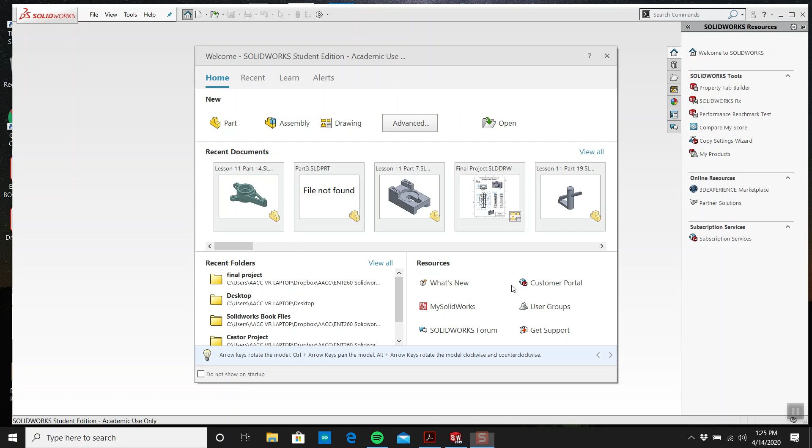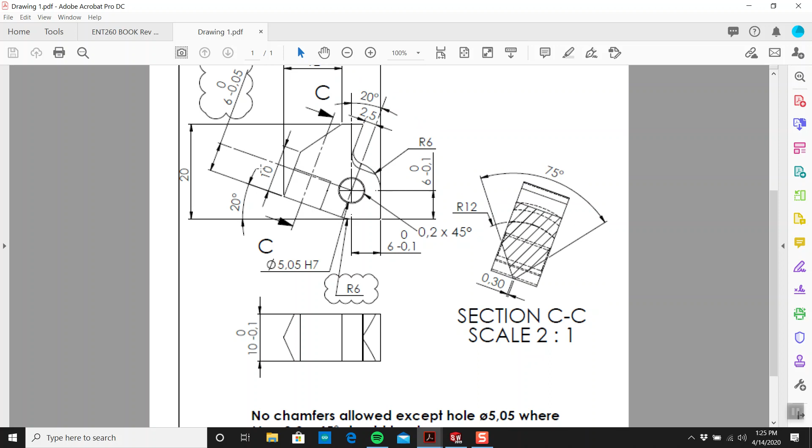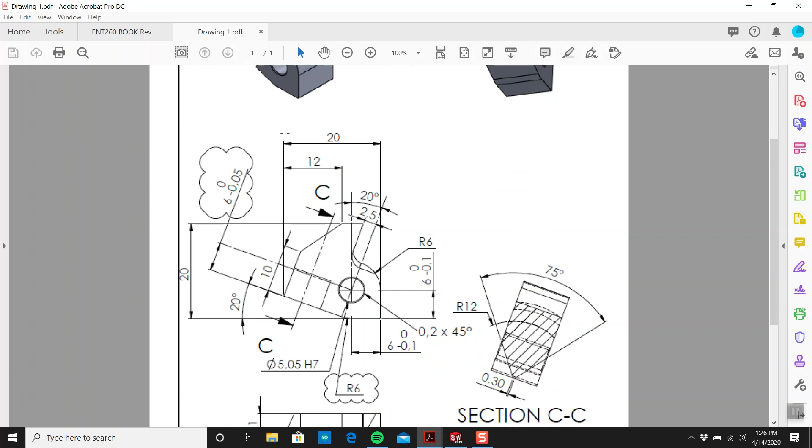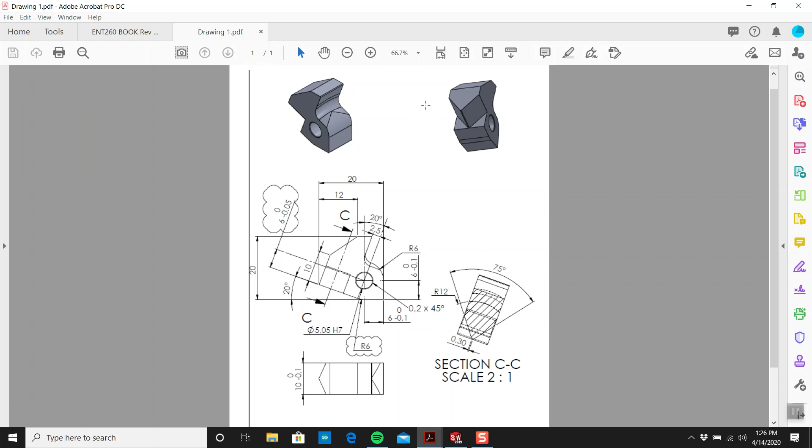Anyway, we'll get back to this later. Hold on, close current tab. Here we go, back to a nice easy part.

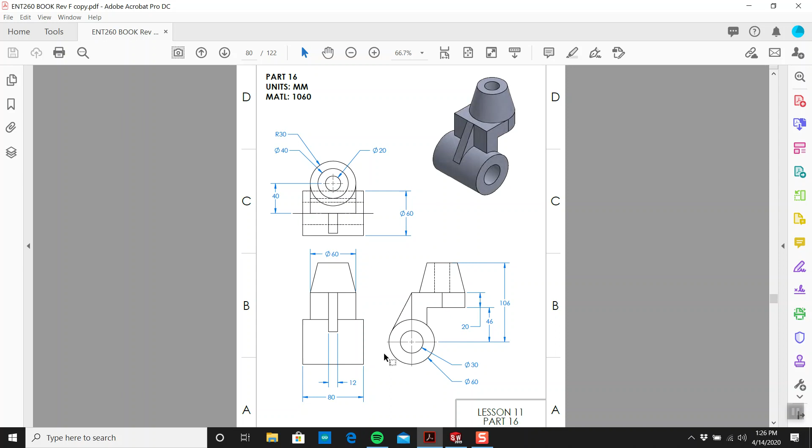So, first thing we'll do is draw this. I think we want to draw this side profile here and do a lot of shared sketches. That's what I'm thinking. This is going to be our origin right here. So let me get my paper out.

Do you know what I should do? I should bump up the financial reward and add that last part. But that is a beast. Anyone else that has parts like that, definitely send them on to me. If I have any naughty bold students in the next few semesters, that's going to be their extra homework.

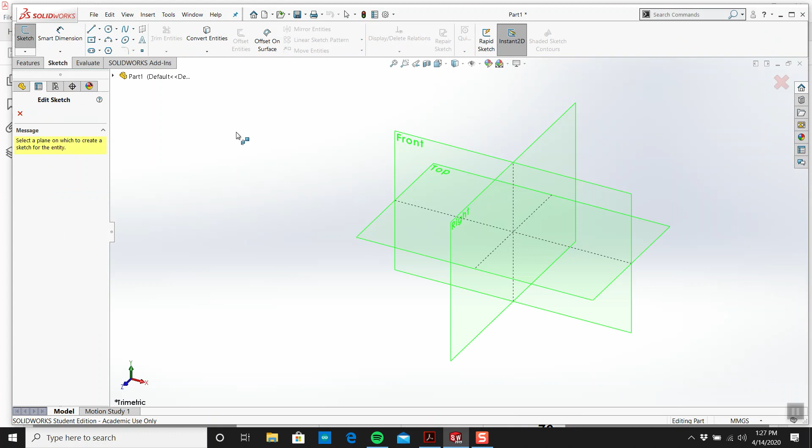So anyway, we have a diameter 60, a diameter 30. I can remember these, right? So let's go and get a new part. We'll change the units again. And we have two circles there, 60 and 30.

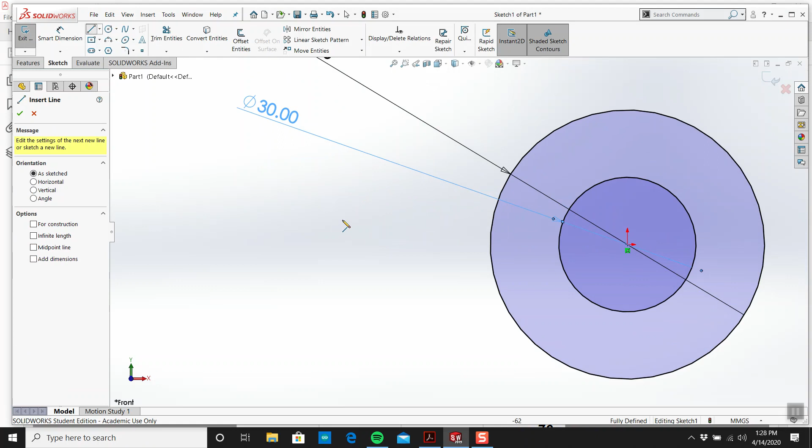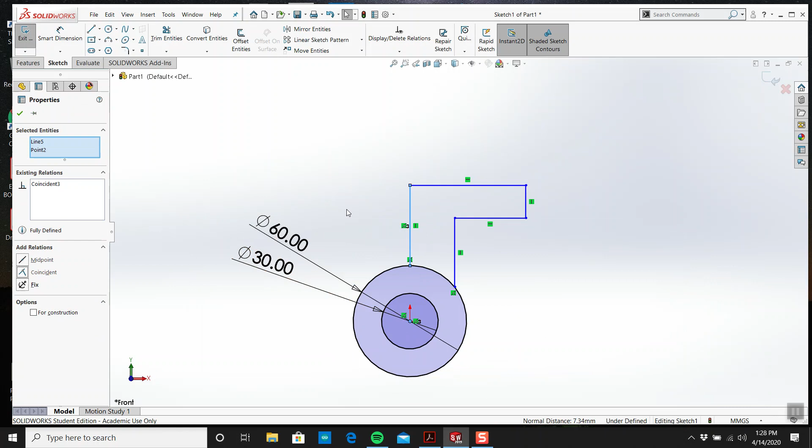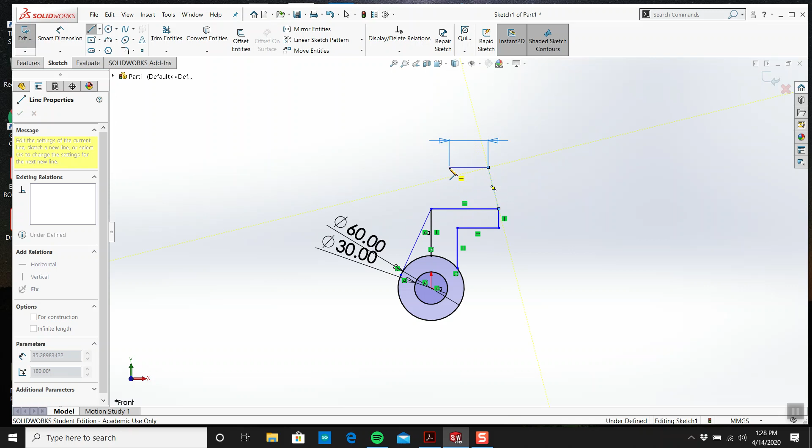Now we come up here and we have like an L shape. So if I come up here like this, maybe something like that. Does that go all the way down? It does. This and this are coincident, and then this is a tangent line from there. Now I'm going to make these two tangent. And what else? We have that. And then there looks to be some sort of something like that.

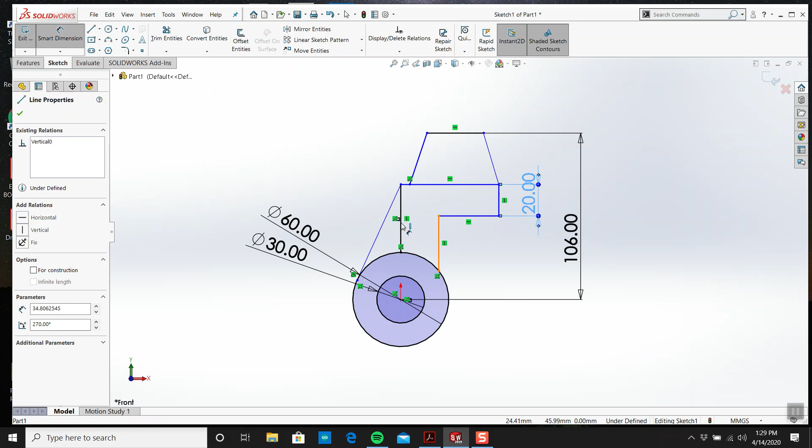Now what are these dimensions here? 20, 46, 106. Let's do the 106. Where's that going from? From here to here, 106. This is 20 - now this is missing from the drawing, so bad form on me. That's 20 there as well. And what did we say? 46.

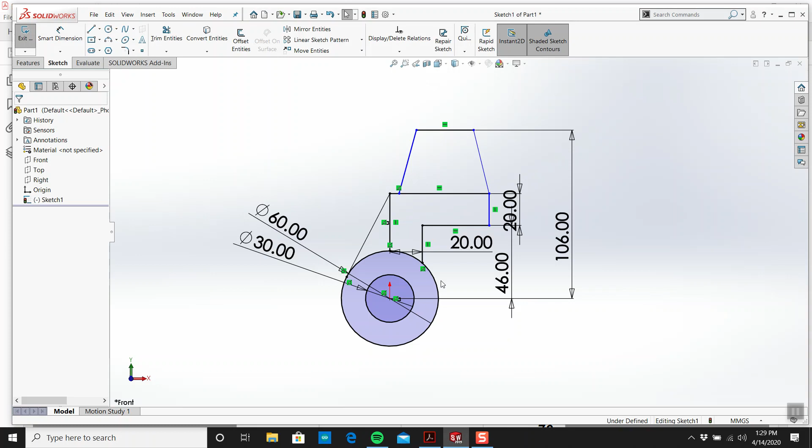Alright, and then we have the 60. What is the depth? 40 - 40 will bring that to the center of that. Oh geez, what does that make me think? If I get a center line from there, can I make this vertical? I'm going to make that 40. So from here to here is 40, and that brings that out. That's okay.

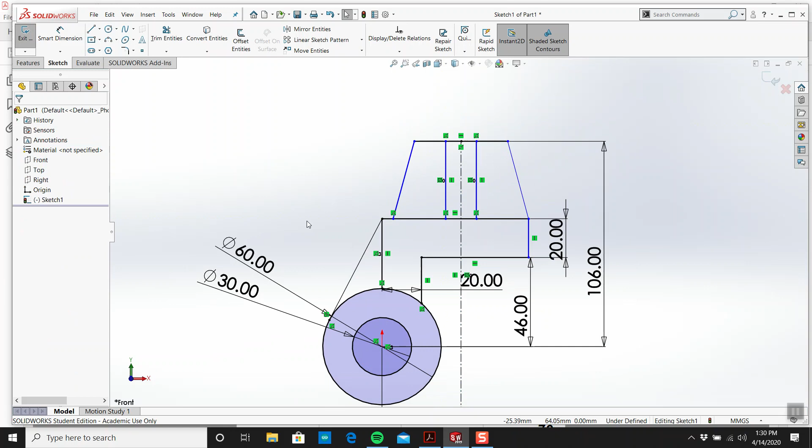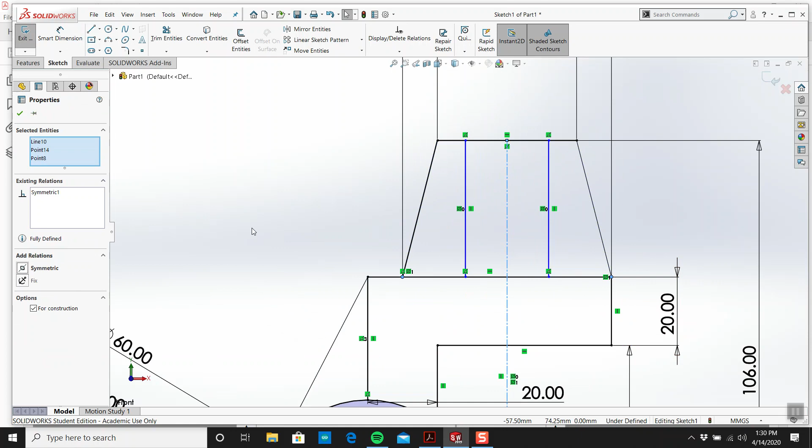And we have a line that goes from there to there, and from there to there, and this is symmetrical. Now the top of this is 40 and the bottom of that is 60. Is that right? So from here to here is 40, and from here to here is 60. Now this point and this line are going to be symmetrical, and that pulls that in, and that's all black, fully defined. And then this is diameter 20. Okay, that's my sketch.

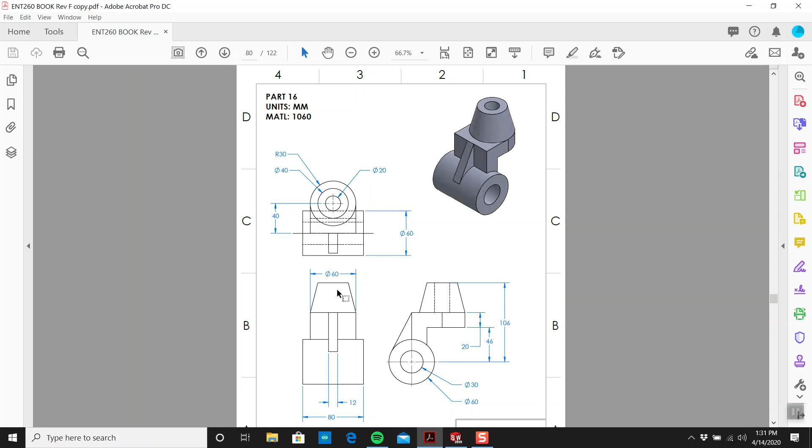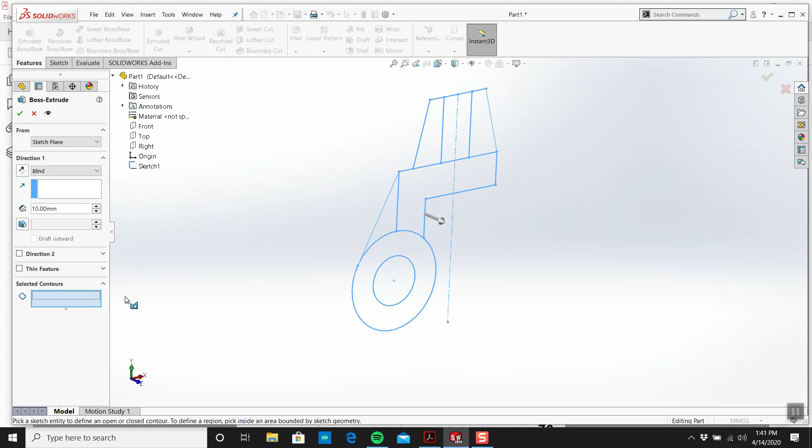So I'm going to exit out of this, and do an extrusion, mid-plane extrusion of 80. Just bear with me one second. Right, sorry about that. Where are we? We got this here. So I need to extrude this 80, don't I? Mid-plane, I'm going to make this 80, and go OK.

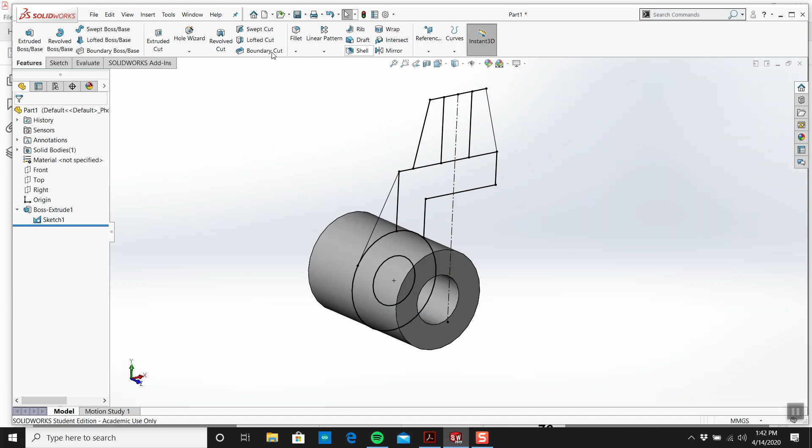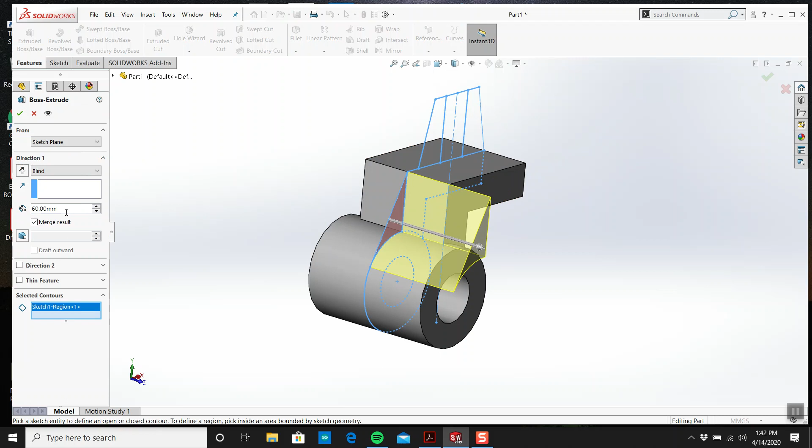And what's the next one? This L shape, and that comes out 60. No problem. Alright, click the sketch, click the feature, mid-plane. Alright, and then look, we're going to get this rib here in the middle as well. That's 12. Man, this is too easy. Mid-plane, 12. Okay, now what's next?

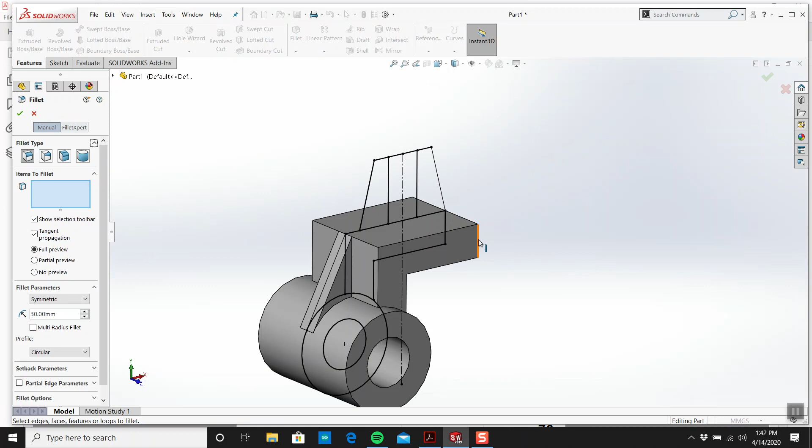We're going to do some fillets, radius 30 fillets. So I'm going to go fillet 30, bang, bang. Got that. Next, we're going to do this.

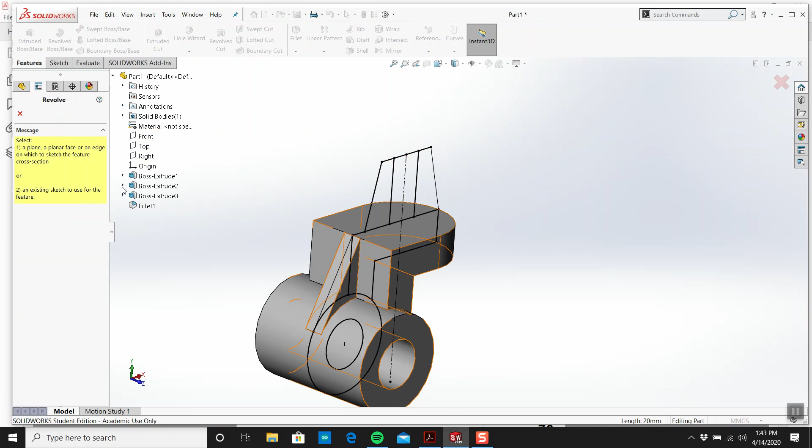We're going to do, look at this - this thing, funny enough, this hole here doesn't go all the way through. It just goes - are we missing a hole there? Do we have that? Yeah. This thing, all it goes down to is there and it stops. So I need revolve. And I'll select this contour. It picks that center line. Merge result. Turn off the sketch.

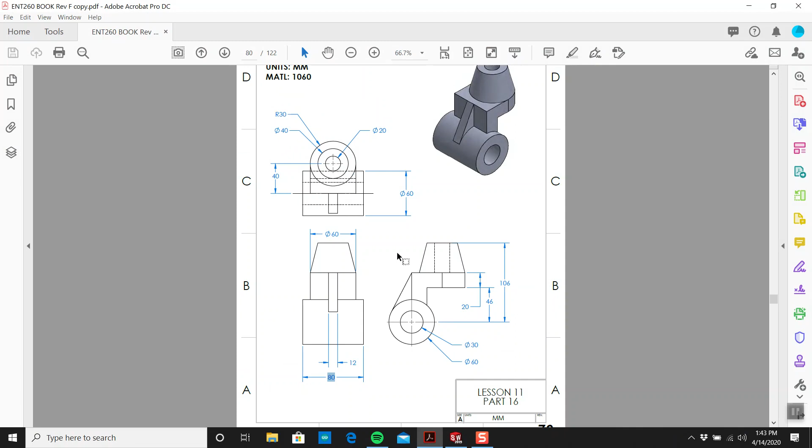And that's it, part number 16, piece of cake, no trouble to use. Alright, I'll move on to the next one. That looks a little bit hairier. That's good, I need a challenge.